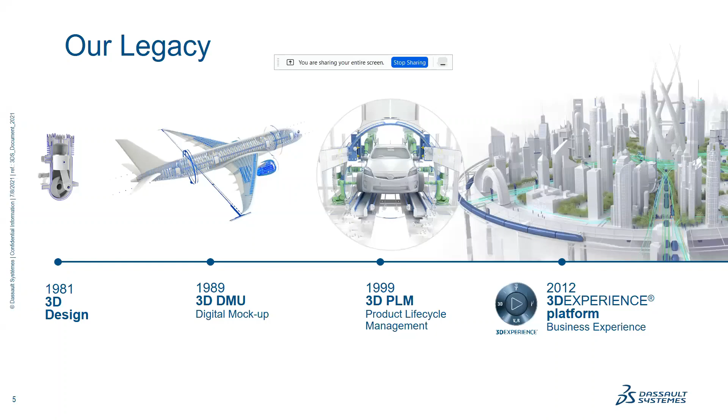So with regards to the topic I'll be talking on, we will be leveraging the technologies and software solutions that Dassault Systèmes' 3D Experience platform gives to come up with an end-to-end solution for a requirement like additive manufacturing.

As you all know, additive manufacturing helps in lightweighting and coming up with innovative design concepts. We need to work on a way of identifying the requirements and automating the best practices to generate designs, and optimize from a design exploration standpoint.

Once that design is identified, we also need to virtually validate it by understanding the physics of the problem and solving the simulation considering all the scenarios or load cases the component will experience, right from the coupon level or small material property level to the complete part level functionality.

The platform helps automate through different rules and templates to enable one to replicate the workflow. Subsequently, there is a lot of testing needed to validate any innovation, so we can leverage the test data management we offer on the platform to do complete physical testing to confirm our virtual validation.

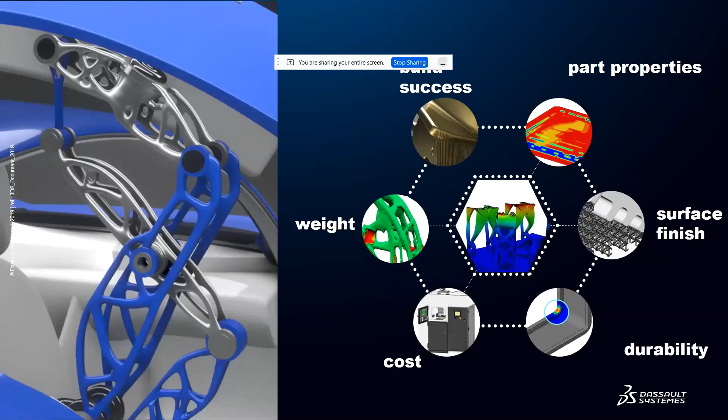What are the typical challenges one looks at, and how can we leverage simulation to address them? Right from the design part, where we have materials of different types - metal, plastic, ceramics - and different requirements, right from stiffness to compliance, which need to be considered upfront in the design stage.

In manufacturing, there are a number of challenges in terms of what material choice we take, what is the impact of the design on the production, and what is the productivity for this part of a design, and so on.

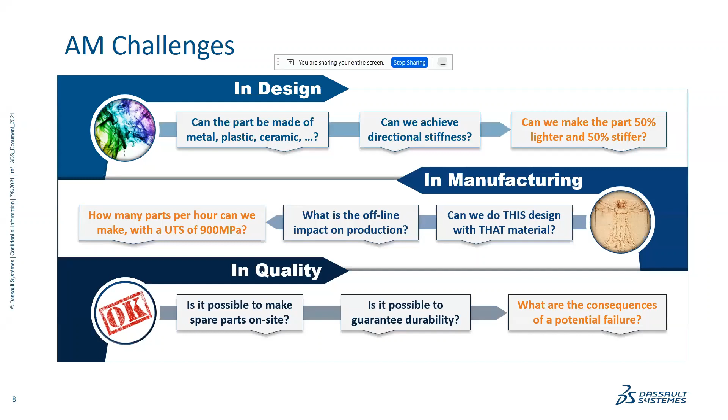Likewise, once the part is manufactured, whether it is possible to meet the necessary on-site manufacturing capability, or whether it is going to have any failures, or what is the durability or life cycle of this part. These are all new challenges which have already been addressed in engineered components, but manifest differently with new technologies like additive manufacturing.

The challenges range especially with regards to metal additive manufacturing, where we are converting a powder into a 3D part. The fascinating thing is we are looking at creating something ground up, right from the powder form, right from the raw material form, to a complete functioning part.

That is the power of this innovative manufacturing technology, where we need to think about, or where we have the opportunity to come up with very unique designs with regards to additive manufacturing.

With the pace at which manufacturing technologies are catching up, we are able to leverage innovative machines which allow for multi-laser manufacturing, and also creating different high quality finishes with low defects and field behavior aspects. These are all amplified when you consider the use of innovations in the software technologies available at our disposal right now.

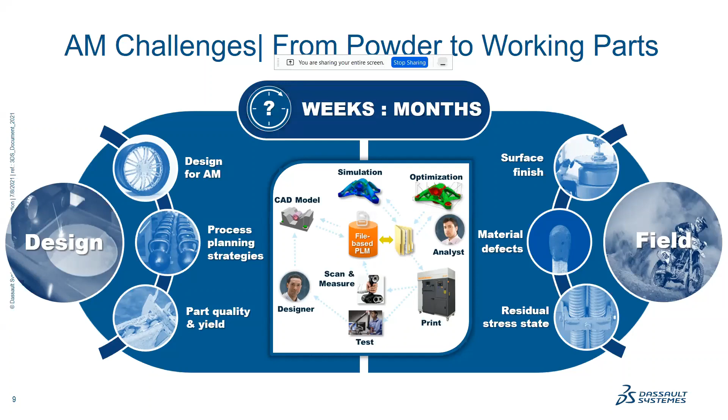So you have the state of the art CAD solution working in tandem with simulation, and also the innovations of the machine, to be able to come up with new design programs. Earlier, these kinds of workflows, especially in design, used to be file based. Now with innovations like we offer, we are able to reduce the time cycle for addressing these challenges from months to weeks.

So these are some of the benefits of how, by going digital, we are able to use domain specific tools and work in a collaborative environment to eliminate the different silos that occur when you are working individually. Like say the designer is working out of sync with the manufacturer, who's out of sync with the supplier, and so on. The digital platform helps connect these different silos and unite all the functions, which can eventually provide the best business benefit and leverage sustainable innovation to come up with a better product design.

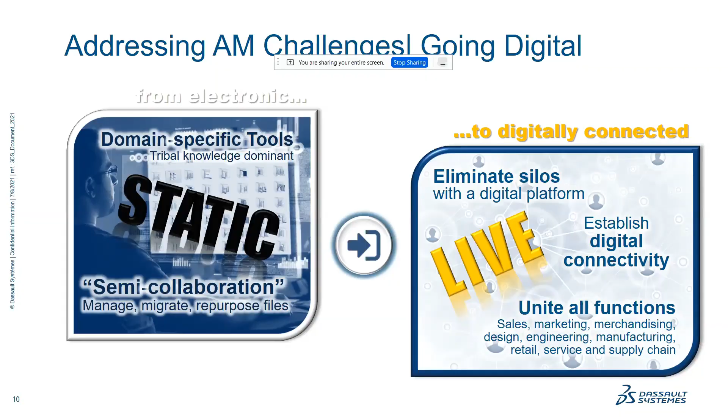So the 3D Experience platform is a data-driven platform which is connecting the different silos in a model-based virtual environment. It works similar to an app store, where you have a platform like a Windows system or an Apple iOS, where you have these different apps which are plugged in, and all our apps are developed in house. We can develop apps for CATIA, which is for 3D modeling, for Simulia for simulation, for the backend data management, and so on.

So these technologies are what we are going to use, and we provide for doing our overall end-to-end lifecycle of simulations for additive manufacturing. These give us the tools that are necessary to come up with new ways to engineer the products at different scales and to enable innovation in a very efficient manner.

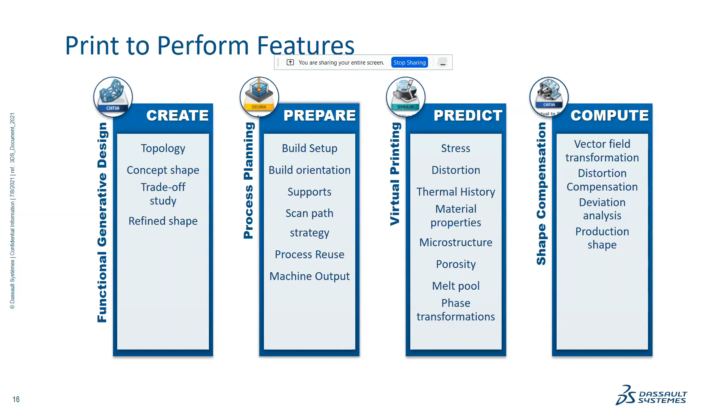So the first part, which will help us generate the optimized lightweight design, again through simulation, is called functional generative design. Let me take you through some snapshots and key aspects of the process.

So the workflow is like you start off with a certain requirement. You are trying to reduce the weight of a part, like say you're looking at a bike swing arm. The swing arm is made up of multiple parts.

In another application, you're looking at a hydraulic manifold, and you're looking at some flow conditions which could be optimized. So the generative design is not only limited to structural; it could also be through some sort of flow optimization in either of these cases.

So you have such requirements, and then what we need to do is start off with what we call the design space setup. You indicate that this is the space or the overall volume in which my final part should appear.

And then we set up the different constraints and targets, like any boundary conditions, such as fixing up a certain part in an assembly, like a swing arm in a chassis. There will be certain points in which we want to constrain, and then we can specify targets, like for the design space I want to reduce the volume to a certain level, or my mass of the part that I'm getting optimized should be so much. And then we can give the loads and boundary conditions and any manufacturability conditions.

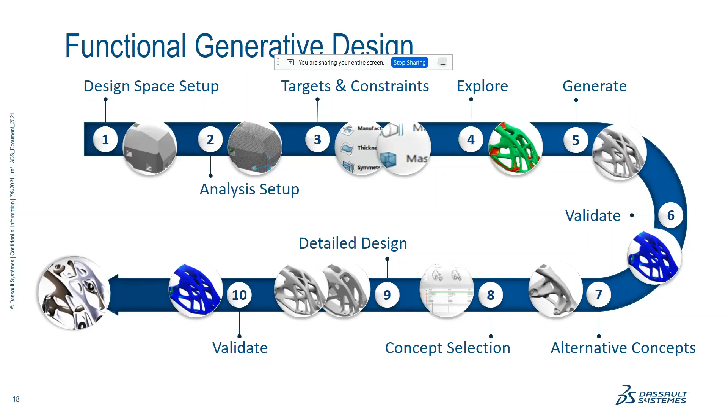And then you can do a concept selection based on these, and you can seamlessly analyze against these different KPIs, the key performance indicators, to understand which is giving me a better design. And then once we do that, we can go in for a detailed design and validate that and even make it.

So our additive manufacturing with the functional generative design, as you can see in the animation, you're looking at a part.

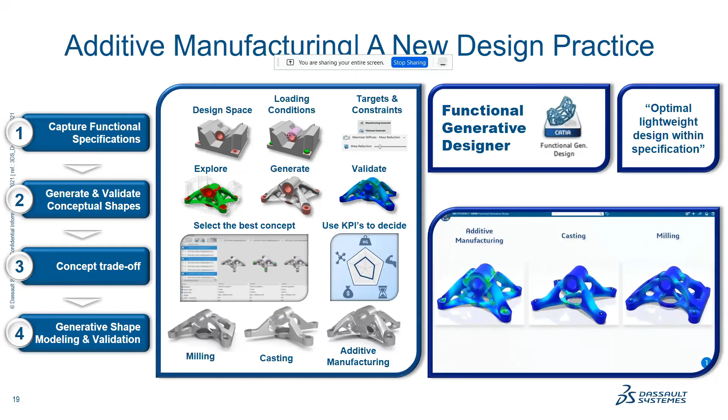The design space is shown here, where we have a design space which encompasses a larger volume. Then we constrain it at certain locations wherever we are fixing it up, and also specify the loads. Like in this case, some bearing load is given, and we are fixing up certain locations. And then we can give different manufacturability constraints, like casting, milling, so we have a set of design shapes, design choices, and then we can seamlessly validate those with the loads, and evaluate the trade-offs and which is a good choice of the design.

I'm just playing a quick video to show you the workflow process. It does not have audio, so you can just see in a larger format the workflow that we just talked about. Here you're looking at the design space creation for this part, which is shown here. So this is the design space.

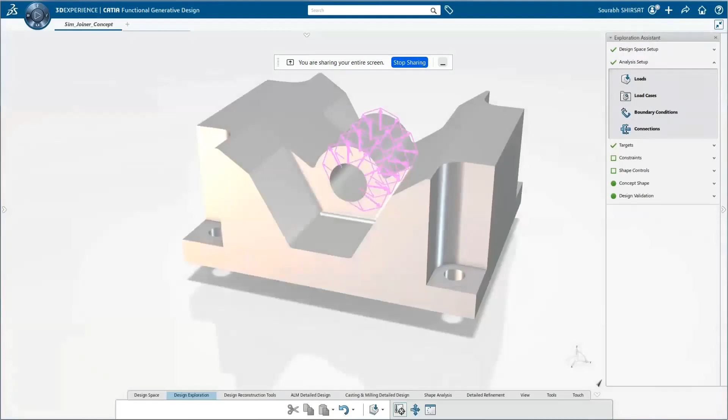So we will set up the model quickly as we discussed, mesh it, constrain it, and apply the necessary loads and boundary conditions. So you have a bearing load which has an offset, and then you have constraint locations at the connection points, which are basically left untouched during the topology optimization, where material is removed from the bulk to reduce the part while meeting the structural stiffness or compliance requirements.

So you can give different constraints, thickness constraints, manufacturability constraints. If you want to do something like casting, then you specify the direction in which we are going to remove the part. If it's milling, then we specify the milling constraints. If it's additive manufacturing, we could specify the overhang constraints to ensure that the part does not have features which are overhanging by 50 or 60 degrees, and so on.

And then you can even visually see here what the process is, to understand the different parts that have been done. So you have a casting which has multiple components to the runners, additive manufacturing, and also milling. So this is a common tool, it is not limited only to additive manufacturing. So we then use this as a complete end-to-end design optimization solution.

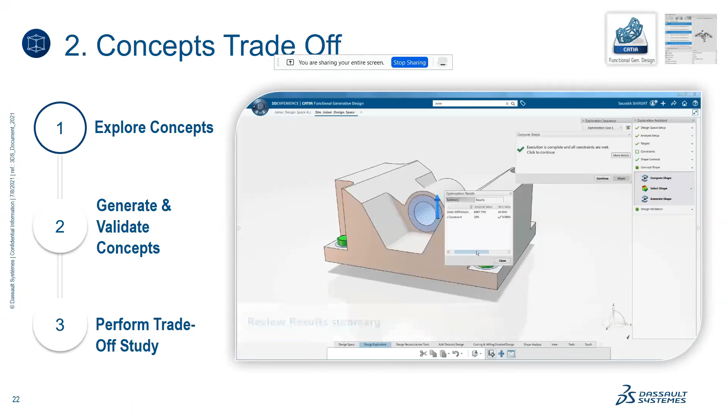So just to summarize, the workflow involved creating a design space, defining the loads, boundary conditions, defining the targets and constraints, and then we can run the simulation to generate different shapes. Once the simulation is completed, we can generate the concept shapes. So you can see here some of the different concept shapes that will appear based on the satisfaction of the constraints and also the targets.

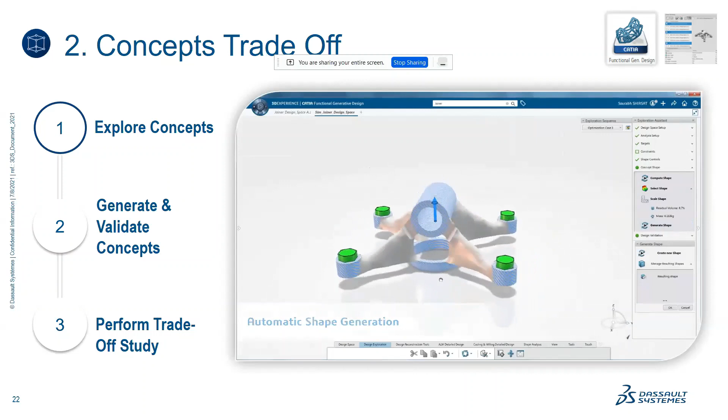So we can see here the solution. Then we can generate the isosurface values based on a slider-based mechanism, where we can choose the level at which we want to consider the mass. So then we come up with a concept for the topology optimization, which gives us a platform to improve the design in an incremental fashion.

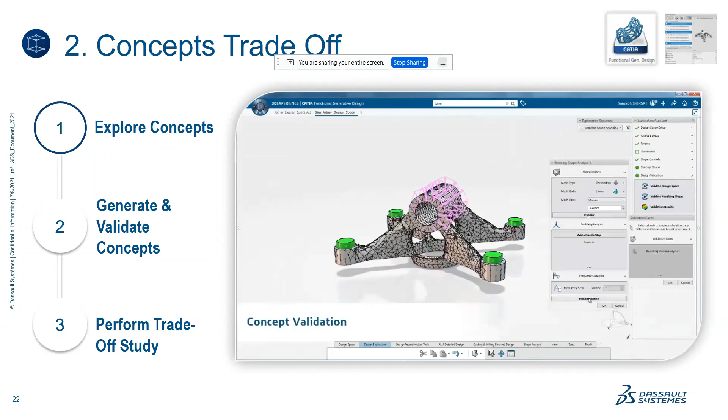So now, without going into any refinement, we can just automatically validate the part. But obviously there will be some manual work required in terms of smoothing the part and so on, to eliminate some of these hot spots through the process of shape optimization, etc.

So our solution gives you a complete, easy to visualize set of options to monitor the optimization process, as well as to generate these quick concept shapes based on the B-rep results, which will eventually help us to generate the structural geometry in a very easy manner.

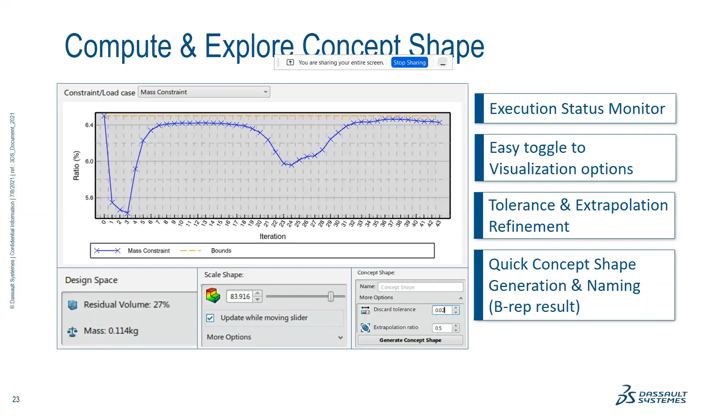And since we have a very strong portfolio of products for 3D modeling, we give that benefit of regenerating the surfaces in a very easy fashion, where you can quickly smoothen out the part and generate certain features which the solver might have ignored in certain locations. Then manually we can inspect the part in the virtual platform, and improve the part features, and then improve the design aesthetics, which sometimes are not considered in these kind of optimization solutions.

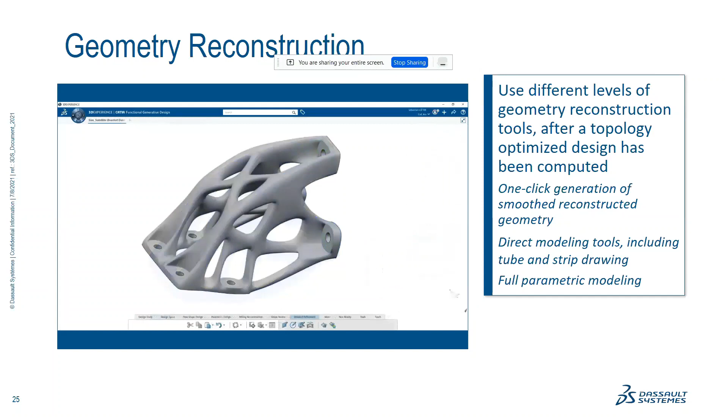And then we are able to validate this newly smoothened out designed part.

These overhang constraints, which help in the additive manufacturing space, work by restricting the kind of part features which are generated as material is being removed, so as to not exceed a certain angle of overhang. These help with challenges in support structure identification, orienting the part on the build plate, and so on. Such constraints upfront in the design space are helpful in reducing late stage issues or complications from a manufacturing standpoint.

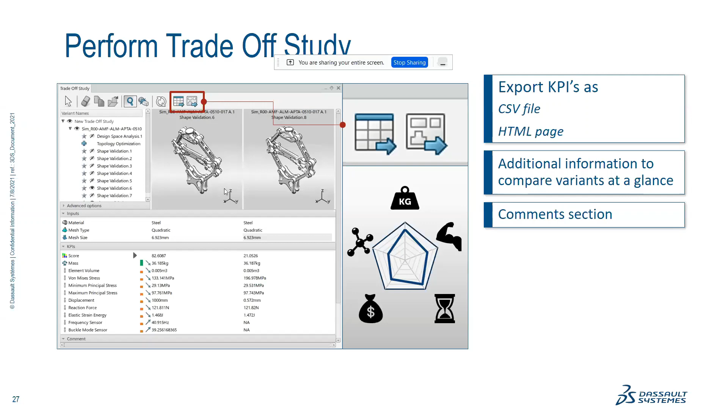We can then perform KPI based studies and trade-off studies. For example, say you have two different shapes that have been generated, you can see what is the mass, look at the peak stress values that have been identified, and see the different responses of the part for the load cases, all visualized in a dashboard fashion.

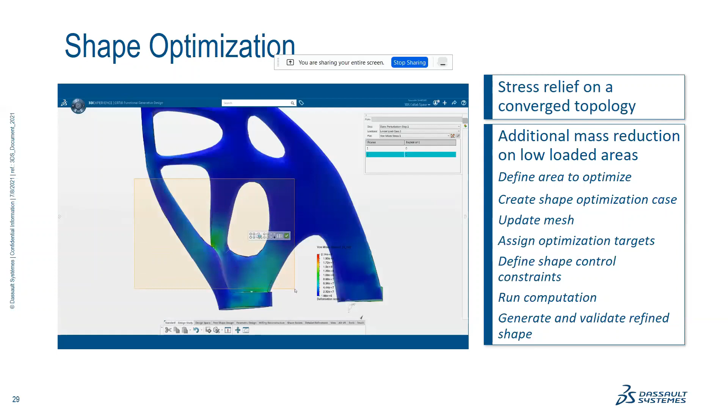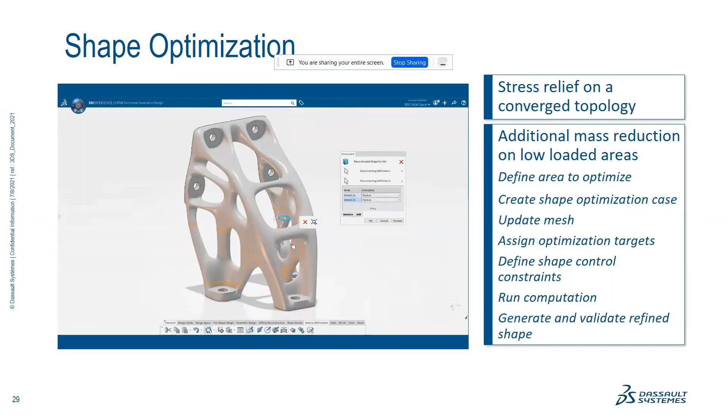Shape optimization is the process by which we can further refine the design to improve structural performance, reduce mass, and remove any local hotspot stresses, improving the design overall. It's where we take a legacy part, generate a topology optimization part, and then improve certain regions to give a smoother, more refined shape to eliminate these hotspots. As you can see in this demo, certain kink regions generated from the optimization have been smoothened out in the shape optimization solution.

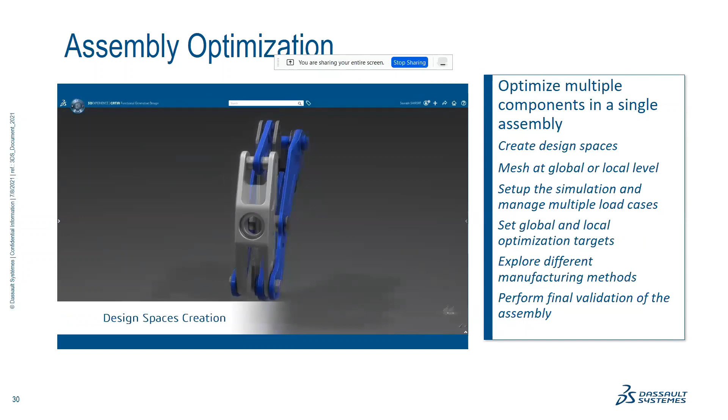Additionally, we can also do optimization from an assembly optimization standpoint, where we optimize multiple components in a single assembly. We create the design spaces, mesh at both the global and local level, then set up the simulation, manage multiple load cases, explore different manufacturing methods, and perform the final validation of the assembly.

We offer a guided step-by-step framework where you have these three different parts which need to be optimized. We specify the loads, set up the simulation for topology optimization, and let it run to give us these different concept shapes.

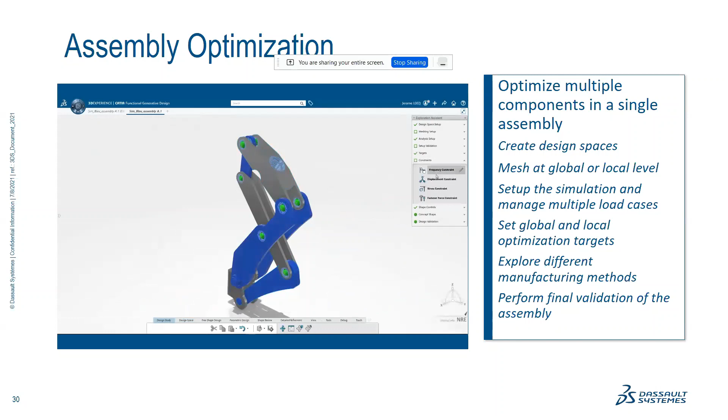We have a load case manager where you can handle multiple load cases. We specify the requirements in terms of design space, target maximum stiffness, weight, and so on for these different parts, along with any manufacturing conditions, like a milling constraint. As you can see, the design shape generated from these parts is shown here.

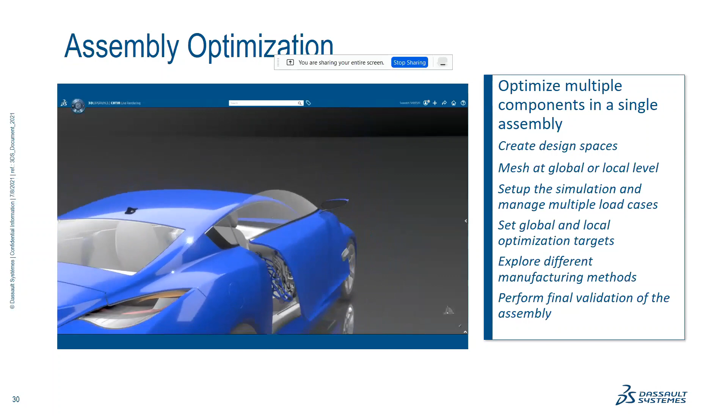We then perform the final validation of the lightweighted part and check whether it meets the requirements.

The next stage, once we have the design, is to prepare the manufacturing process for additive manufacturing. The manufacturing simulation workflow is done through the Delmia brand of applications on our 3D Experience platform, providing a complete virtual environment for manufacturing process simulations. For additive manufacturing specifically, the workflow involves a build planning stage where we can represent the machines, bring in the part to be printed along with the machine, and work on orientation, support structure generation, scan path, and print generation, which we'll see in the next few slides.

The step-by-step process is designed to reuse as much as possible. In an industrial setup, you have the methods development team, consisting of expert users who prepare different templates and rules and save them, which can then be replicated by field engineers or the design team to maintain a high quality design standpoint. It's challenging to expect the advanced team to apply their expertise to every single project, so their support is obtained through this rule templatization and replication of the different process stages by the design team.

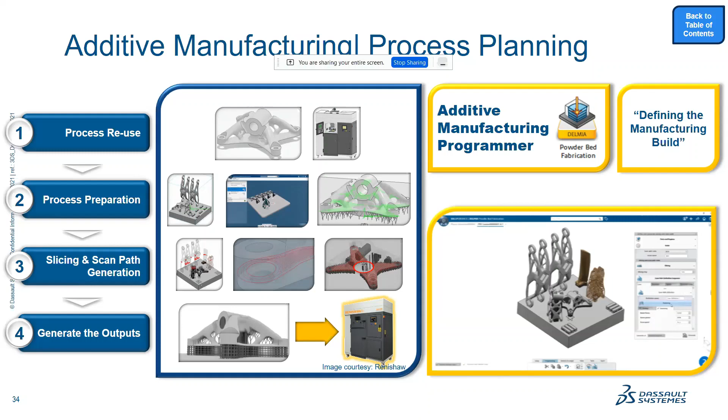These generated outputs are seamlessly replicated in the simulation workspace to get as accurate as possible scan path motion and slicing, so we can represent the equipment design from a virtual machine standpoint.

We incorporate the complete gamut of data needed to represent these machines, from the build envelope size to the scanning path type, the directions of coating, and the speed of the recoater. There are numerous customizable parameters available as well.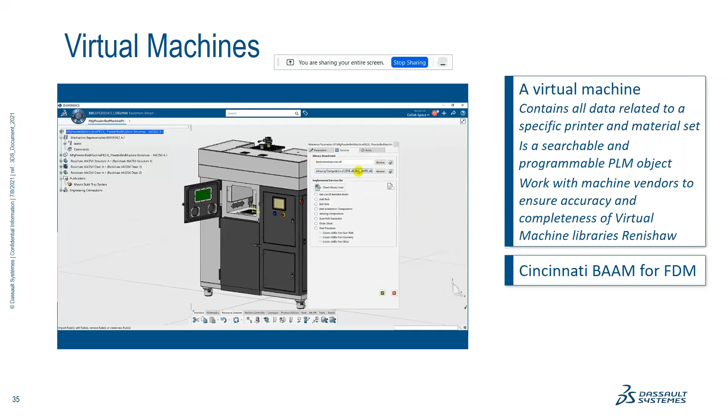It helps you build your own library. It's not a complete library deck that's provided, so you can have numerous machine vendors replicated through templatization of the machine data.

It helps to reuse the process as much as possible to amplify and reduce turnaround time. You can retrieve material and orientation information from our database, then use the specification for that material. We can then templatize rules for nesting, support creation, laser path motion, slicing definitions, and so on.

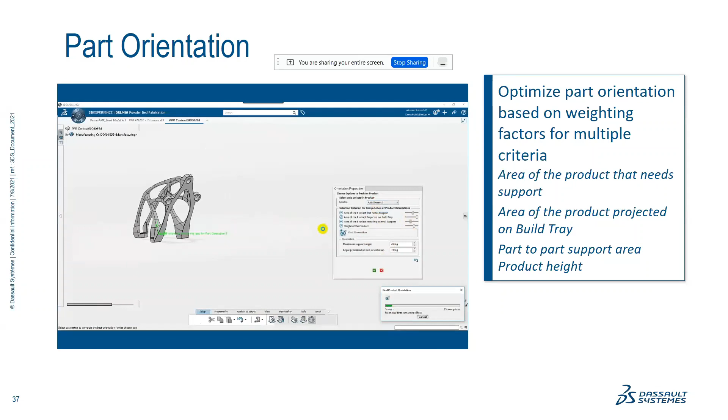Here's an example of how a part can be optimally oriented on the build plate. You have multiple factors, addressed by slider ticks. You can see the slide bars which drag left or right to reduce or increase the impact of a certain optimization parameter.

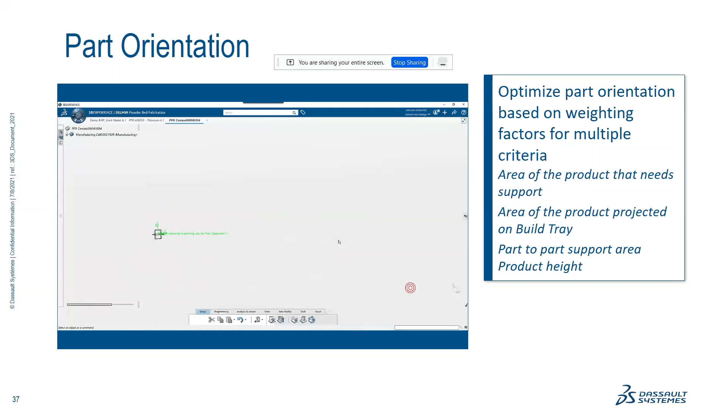You can reduce the surface area of support structures projected onto the build tray, or look at the product regions that need support structures, and so on. All these orientation-based evaluations can be done in the virtual environment.

We can also create multiple parts to be printed in one workflow, and then orient these parts suitably. We have collision detection capability, and we understand how to reuse orientations for parts of certain types.

Likewise, if we are generating any supports or parts, and the part is repositioned, the support being generated also gets realigned to the best level possible.

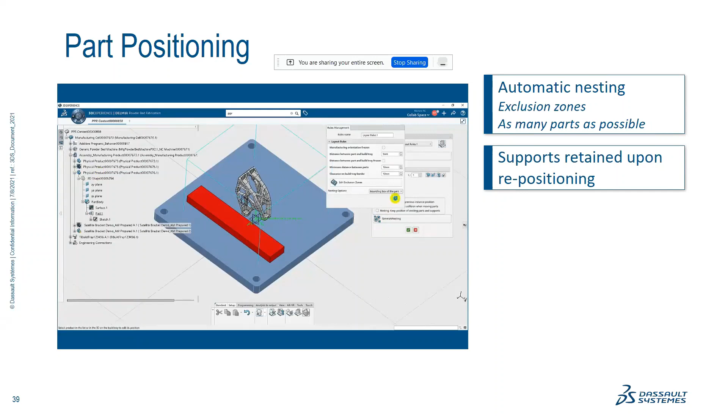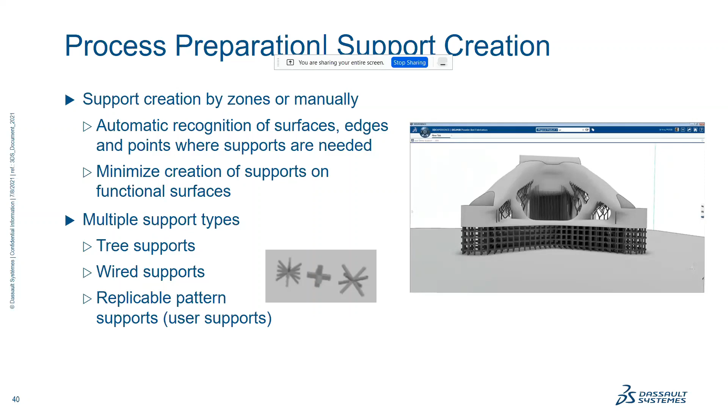The next part is to generate support structures, either by automatic creation or manually designing the parts. You have automatic surface recognition, and edges and points where supports are needed can be generated. We offer different types of supports, like tree supports, wired supports, and so on.

You can also manually create these different types of supports, since we have the design capability, or use the automatic option. Here we're showing tree supports, grid supports, and lattice supports, which are generated automatically.

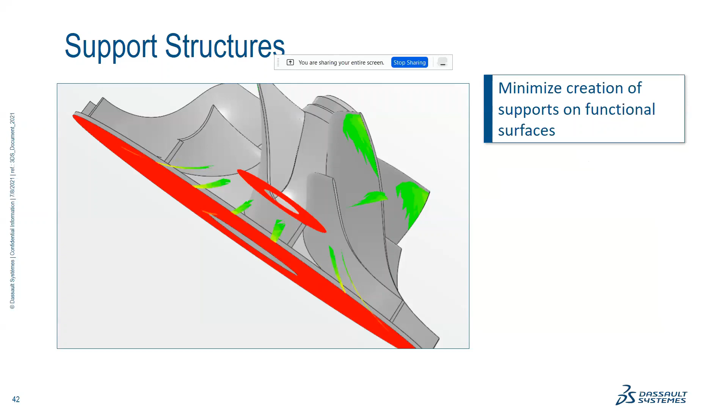These supports can be generated based on minimizing creation on functional surfaces. We can specify certain regions where supports are not to be generated, and green regions where supports can be provided.

Additionally, we can create multiple support structures through design in case certain automated supports are not desired, and then manually design the support structures.

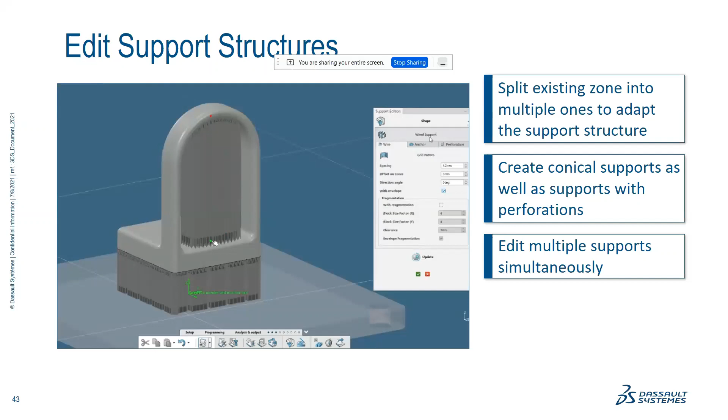As you can see, there's a certain internal support not connected to the build tray. If we want the supports aligned on the build tray for ease of removal, we can redesign the supports manually, edit them, and then issue for printing. We provide the necessary tools for support structure part creation.

The next part of the process is to generate the slicing of one part or multiple parts. We have all the parameters for different strategies, including an area-wise strategy or multi-strategy approach for different areas, in terms of skin layer thickness and core domains. Then we can change the slicing strategy, including hatching direction, between each slice.

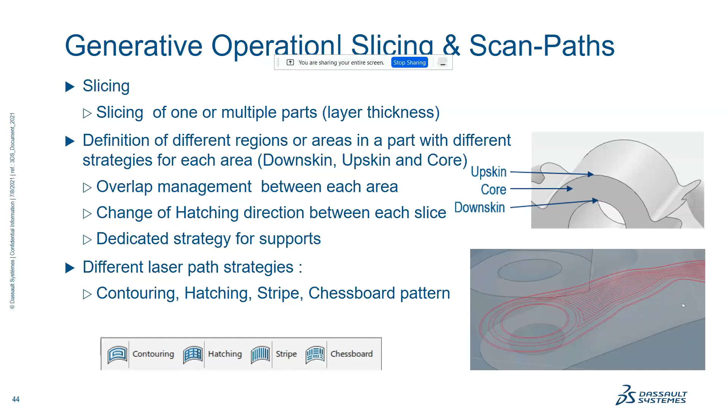We can have multiple rules for the part or supports through the laser path strategy. We offer an icon-based, templatized, guided workflow for slicing and scan path generation.

So as you can see here, you have a part which is oriented. A support structure has been generated, as is highlighted. We have assigned the material properties, and then we are basically going to generate the scan and slice path.

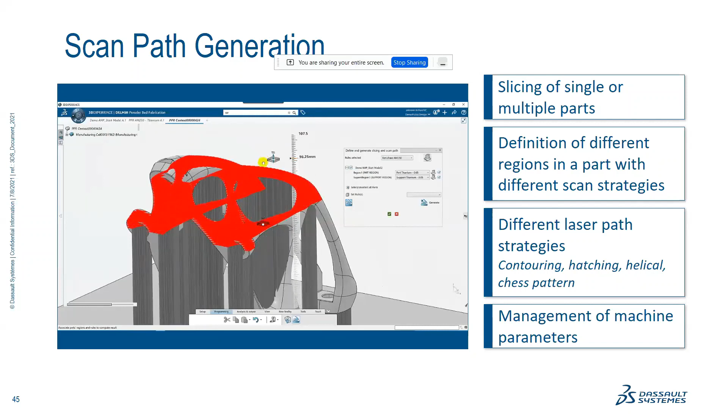So we can visualize the scan and slice path, like what is the laser path motion along each scan layer. Based on the scanning strategy, we are able to visualize the laser path motion virtually, and then based on this, we can come up with multiple options depending on the runtime that is estimated for this.

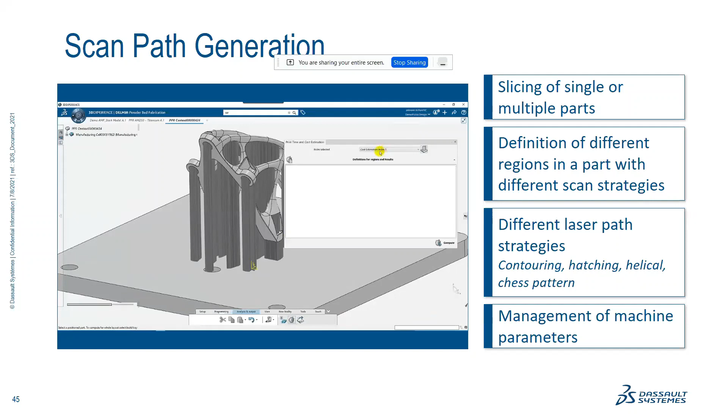So we can change the distance between the laser path motion, or the number of squares that go into a checkerboard pattern. All these things we can vary.

So the next part is, before we go into the detailed simulation aspect, a quick simulation along with the supports. This quick simulation is based on an inherent fast strain method called the Eigenstrain approach, which is based on a library of generated scan paths, and then we automate the simulation through linear analysis and give a kind of quick gap analysis between the virtually printed versus the as-designed part.

Just to reiterate, this simulation does not take into account thermal behavior. It is a quick solution based on the fast strain method.

And once that kind of designer level validation is done, then you can go in for output generation. To a reasonable extent, we can expect the part to behave in a certain manner.

And then once these kinds of outputs are extracted, we can feed them directly into the machines, or we can interface with these machines through their native formats or through neutral formats.

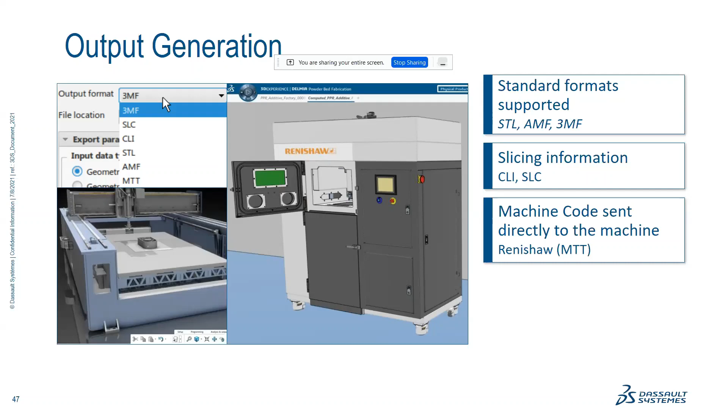We can also obtain print time as well as cost estimation. We can add new rules to estimate the total print time. We can add print cost as an output, and we can even work on optimizing it based on those kinds of parameters, like print time or print cost.

The third stage of our process is called virtual printing, and we talk about this from the standpoint of a realistic detailing of the design through the process of simulation.

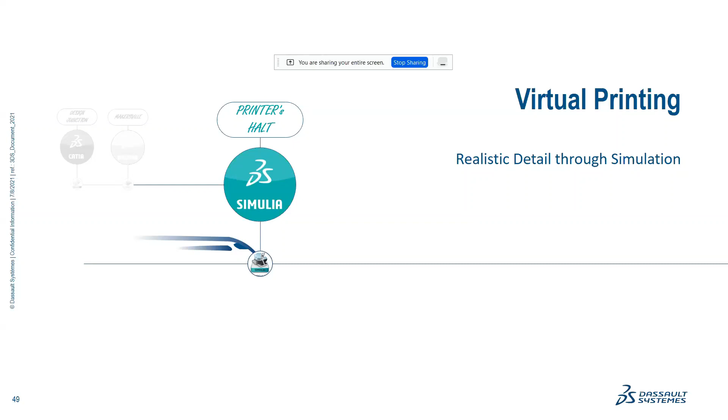So let me go into a bit more detail here, to go into the development which we have carried out, which will help one to understand from where we were to what we have achieved with our new solution technologies.

So it started off in 2014. We started as a technology based on what we call a chunk type, or a kind of domain replacement technology, like you remove the first part of the design and then slowly add the domains one by one as the laser path is moving. That was how we started off with our additive manufacturing simulation.

And then in 2015 and 2016, we developed what is called a mesh intersection toolkit. It was now becoming a toolkit which was delinking the mesh from the CAD design, so we can have a certain mesh or different meshes for the same design, and then we are not limited or restricted in creating meshes based on the geometry boundaries.

So that mesh intersection toolkit was developed, which accelerated our development to the print-to-perform capabilities, which leveraged the end-to-end solutions that we offer from these different brands to reach an extended simulation framework which covers the entire ecosystem of the additive manufacturing process.

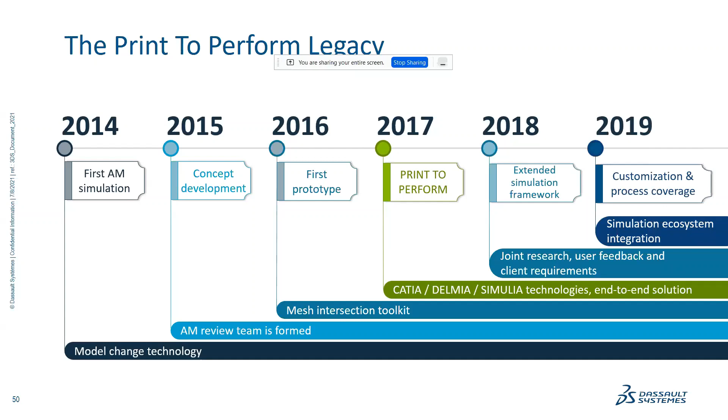So in the process simulation standpoint, we are looking at studying basically the distortions and stresses, and eventually any build failures that could occur.

So we can also look at the properties of the material in a localized standpoint through microstructure evaluations. These process simulations enable us to give a lot of insights into the performance of the part, because these are some data which are not obtained from real world printing.

During printing, incorporating thermocouples or identifying residual stresses and all that are very challenging. So virtual simulation helps to give us a better understanding of the printing process.

So we use the Abaqus solution to do a simulation of the multiphysics analysis.

That is basically a thermal analysis coupled with the structural analysis. So this gives a complete map of the laser heating the powder and generates solidification phenomenon based on phase transformation.

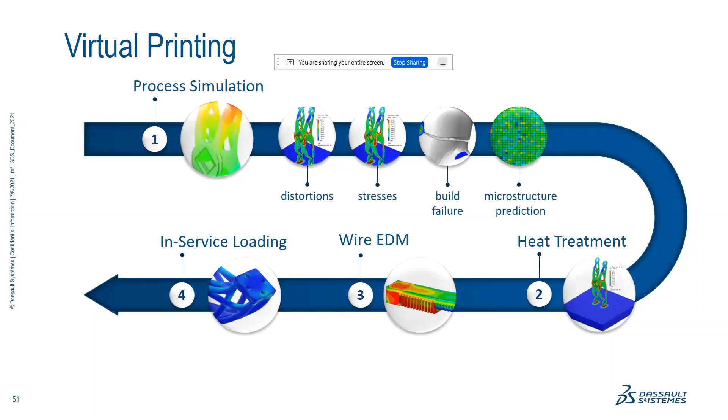So the additive manufacturing simulation capability gives us a complete comprehensive additive workflow solution, and we are able to use optimization of parts to virtually test and manufacture these builds. So we are then leveraging the multiphysics technology to provide a complete simulation capability for in-service loading cases.

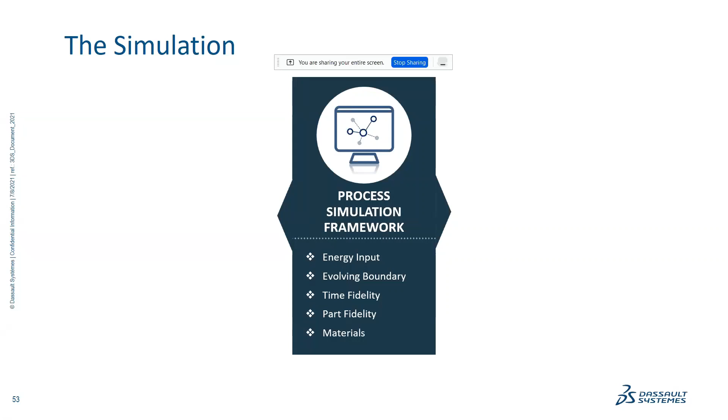So what are the details of the simulation framework that we are using? The process simulation framework for additive manufacturing is the set of tools that we include in the framework for modeling the evolving boundary of the material as the energy input is progressing through time. So the material modeling is very key in this workflow.

And so then for different processes, we need to generate a framework which will address these different processes, like powder bed or energy deposition or polymer based extrusion and so on. And then we work with different machine vendors who have their own formats and so on. So the simulation has to take into account these challenges as well as complications.

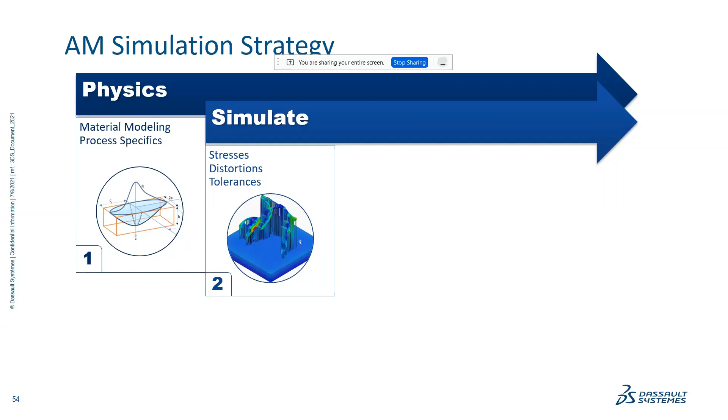So what is our simulation strategy? Our key focus has been on, in addition to the mesh intersection toolkit development, the material modeling process specifics. So you can see that the heat affected zone modeling is very critical to be able to simulate the stresses, distortions, and obtain the tolerances, and eventually calibrate the gap between the design versus the build. So which is all critical.

And so the simulation strategy addresses the right from the physics standpoint to the end customer satisfaction or the return on investment of an additive manufacturing program.

So this virtual printing process is based on a guided simulation assistant for powder bed fusion process. So this is on our Simulia brand of applications on the 3D Experience platform. And as you can see here, we have a configurable general purpose process simulation framework, which can be used for setting up these models.

So you can see some examples of how we are able to remove the supports, and you can see the cantilever warping in the bottom left animation. And on the right side animation, you can see the guided templatized workflow for setting up the virtual printing simulation on the build.

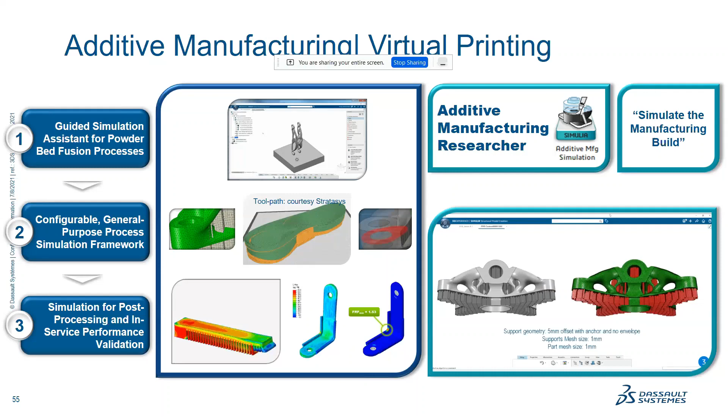So we set up the thermal analysis, the structural analysis, and then the solver does the rest. So the user is not required to go in for a step-by-step process simulation setup. So it is all done in an automatic fashion.

So this is, as I said, the key highlights are a guided simulation assistant, which works with a configurable general purpose simulation framework. And we are having a capability to simulate the in-service part performance once the part has been generated. So what is the key technologies that go into the simulation framework?

First, as I mentioned, is the mesh additive manufacturing tool intersection kit. So basically, you have from the process simulation the data, including the power for the laser, the rate of deposition, the recoater times, the build, any parameters of the build which are adapted, and so on. And the toolkit provides the capability to come up with geometry intersections of this virtual tool along with any arbitrary mesh.

So as you can see, you have different schematic representations which need to intersect with the element. So you have one-dimensional elements, rectangular elements, three-dimensional box elements.

So how do we link it with the mesh? So you have, say, a laser path motion, which is treated as a point line motion. A recoater motion could be like along the same axis, so it is an infinite line motion. Typically, as material is being added in extrusion process, it is done in kind of a rectangular layer by layer fashion. In the case of complex heating models in 3 dimensions, it is like representing the schematic by a box for the mesh intersection toolkit.

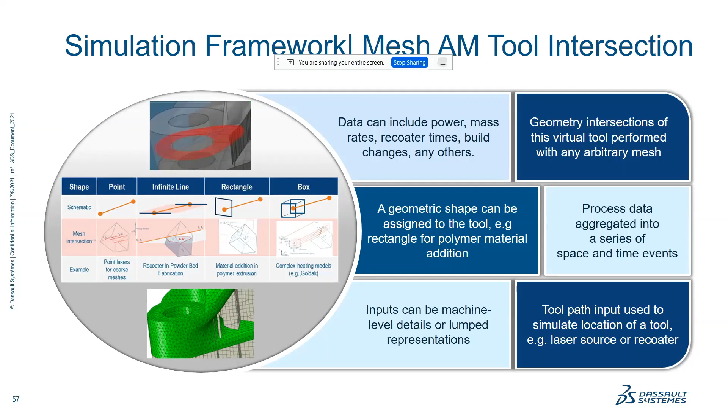So each of these data is then aggregated into a series of space and time events, and then we can input these into the lumped representation and toolpath input used to simulate the location of a tool, like the laser source or the recoater.

So that was about the mesh intersection toolkit, which kind of delinks the geometry with the mesh. So the next standpoint of the framework is how do we handle the material properties as well as the laser path energy transfer, which is key to the thermal capability, thermal structural analysis.

So we have the high fidelity data from the mesh as well as the space-time refinement, and we have programmed in with the built-in subroutines the heat flux physics, which has certain parameters like the beam size, or it could be certain power of the beam as a parameter, and a few more, which is basically converted into some form of a heat load, and then you can activate.

So as you can see in this, you have certain local regions. The image on right shows that if you take a certain volume of a domain, then based on the scanning strategy within that, the heat is generated, and those elements are activated as they are being heated and solidified. So in a sequence of events, we are handling this new surface generation as a free surface heat convection radiation problem, which will give us a complete solution of the thermal behavior.

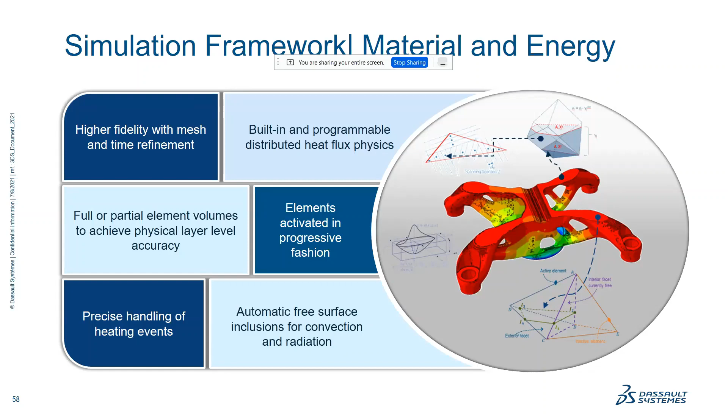So this kind of thermomechanical solution framework gives good feedback for the build performance. As you can see, we can get the thermal gradients as well as the distortions and the stress result. In this case, we are looking at a nested part print.

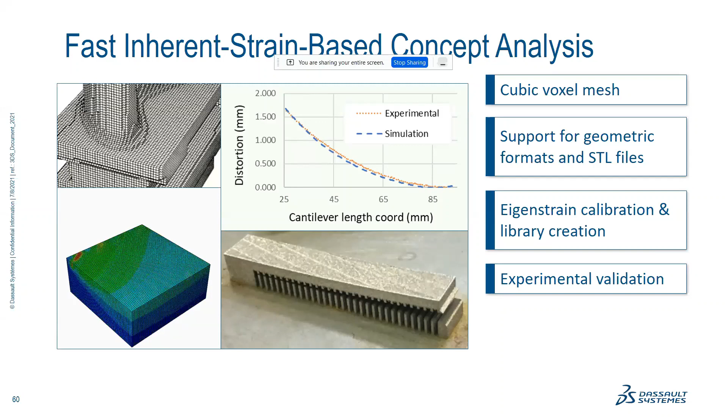So we talked about the fast inherent strain method. What is the difference between this and that? Basically, in the fast strain method, which is a designer level tool, we are meshing it with some cubic voxel mesh, which doesn't completely capture the surface in all smoothness. In the earlier thermal structural analysis, we mesh it using tetrahedron mesh, which gives good structure representation. In the case of the fast strain method, there is some approximation, but we are still able to get a reasonably good result, depending on how good the eigenstrain library is.

We can also virtually incorporate sensors to monitor the distortions. For example, you have an impeller blade being printed. So we are printing this blade, and what can happen is, for certain design orientations or lacking support structures, say on the right side, one of the blades, as it is being printed without support structures, starts to warp.

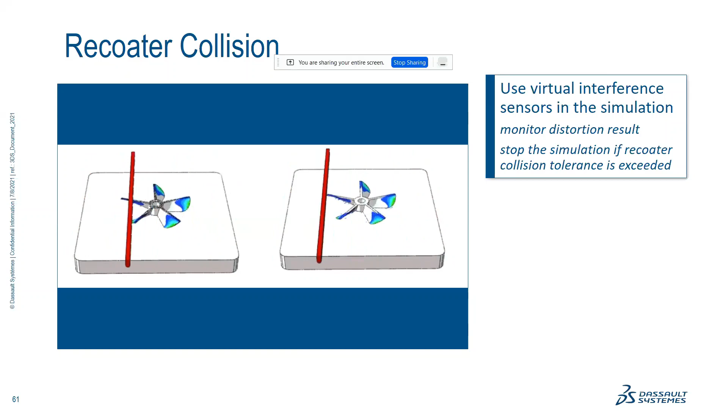As the part is warping, it affects or interferes with the recoater, which is depositing the powder and flattening it out. The part which was underlying it warps and hits the recoater blade, which can either damage the part or even damage the recoater. So to reduce this impact, we can represent that through sensors in our recoater collision capability.

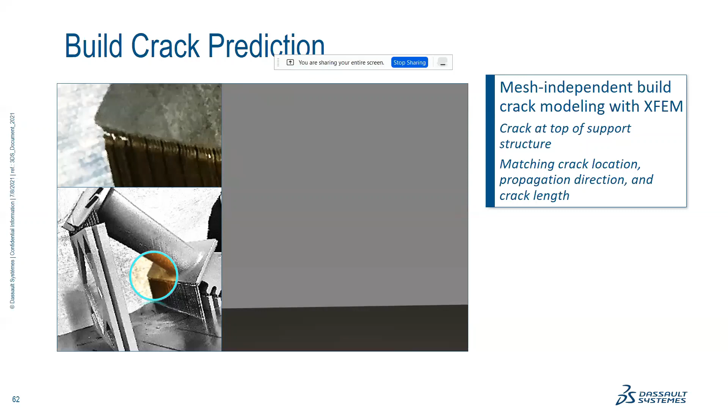To add more value, obviously failure is to be avoided, but unfortunately any solidification process involves some form of stress relieving phenomenon which causes these kinds of cracks. Simulation is a very powerful tool here. Based on an XFEM framework, we can identify regions where a crack is a potential initiator, using stress-based criteria or strain-based criteria, and then we can predict the crack initiation and propagation.

We can also incorporate virtual sensors to identify the temperature solution at any point inside the domain. As you can see in the graph, we can activate the history output to see, over time, what the temperature is. Then we can find out at what point heat is being applied at a certain location, and what time it takes to dissipate the heat to a steady state. Those details give insight into hotspot regions or weak regions, which we can eventually correlate with the part validation.

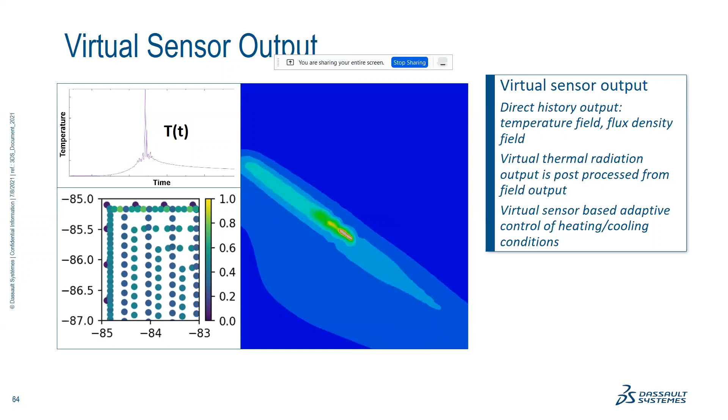So then, as a result, based on this, we can change our scan strategy suitably.

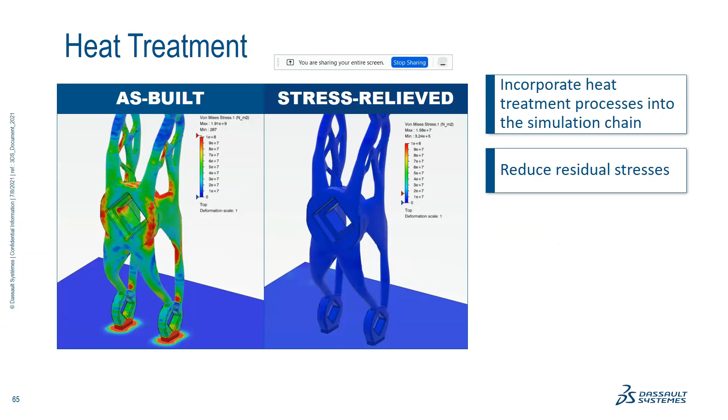Once the part is virtually printed, the stress solution along with the temperature solution is going to be at a steady state. We can eventually go in for some sort of annealing or stress relieving process to reduce the residual stresses virtually.

As I mentioned earlier, we can even do post-print treatment by removing certain support structures which have been tied in initially. Once the part is printed, those ties will transfer the loads in terms of any distortion, but eventually they need to be removed through some sort of machining, which can be activated through the removal of these interfacial constraints.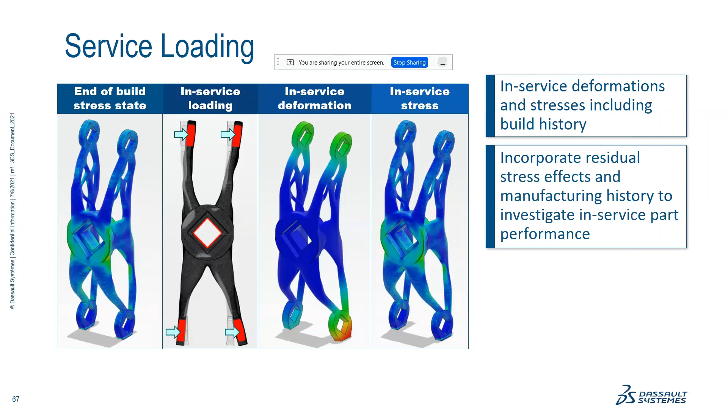Any service loads can be estimated in terms of how it is performing. We can look at the end of build stress state, any in-service loads, in-service deformation, and stresses.

One key advantage which we have seen used a lot in the industry is for repair analysis. You have a certain part, and it's not always possible to build a new part. So any part which has been functioning and has repairs is a limiting factor in performance. So it can be quickly repaired. We have the legacy design, so if any repair strategy is to be evaluated, we can virtually simulate it.

Say in case of a welding process or any part which is to be added, we can simulate the laser welding motion in this repair analysis, and then find out the best way to ensure that the part repair is satisfactory and able to meet the subsequent post-failure criteria in terms of part performance.

In addition to that, durability is also a very important topic. We need to study the residual stress, and based on the methodology in which we are estimating the fatigue life, we can assess the fatigue life, and also improve our design if there are any challenges which are observed.

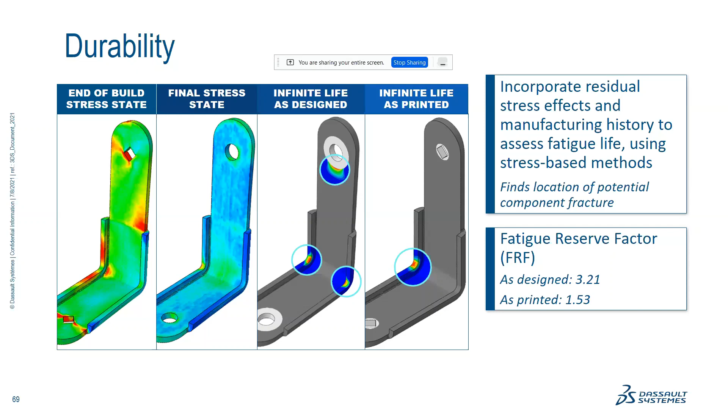To achieve all this, I talked about two key frameworks: one was on the heat flux modeling, the second was on the mesh toolkit. The third aspect is on the material property, how it is predicted. Here we take a multi-scale approach, right from the material behavior at a micro mechanical standpoint to the performance at the post solidification standpoint.

At the micro scale level, that is before the print, we need to do phase field simulations which are handled internally, and then the material properties are obtained through FE homogenization, which gives us a quick map of the properties for the overall domain. Then we can give the thermal mechanical properties for different types of materials as well. The same concepts apply whether it be metal or polymer and so on.

The next part is during the print, how do we map the material evolution? As the realistic temperature solution which has been estimated progresses through the design as the material is being solidified, we need to account for the phase transformation in a very scientific manner to accurately capture the behavior. We are looking at things like grain nucleation and grain growth, and also solidification characteristics like porosity which are generated, which gives a lot of insight into the strength and stiffness of the part.

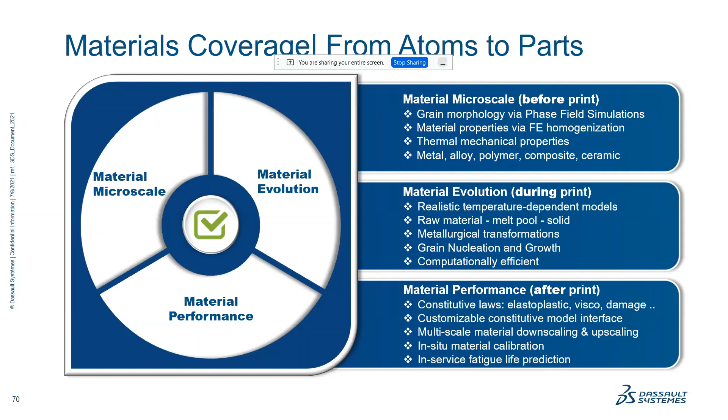So in situ, we can calibrate the material and estimate the fatigue life in a more accurate manner. Here we show some of the details in terms of the validations that are being done.

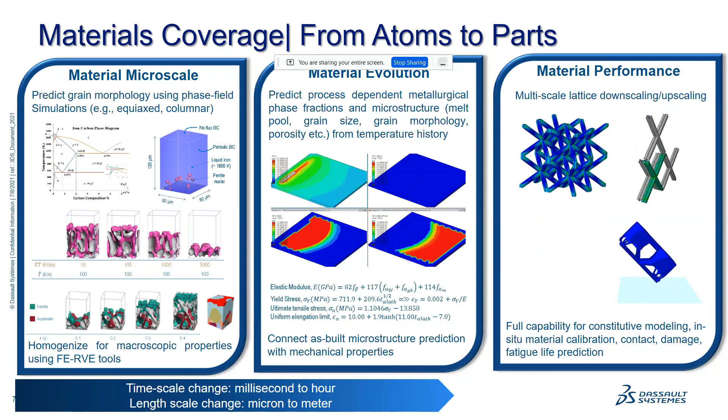Let us look at some of the validations, because as we all know in simulations, the quality of output is as good as the quality of input. So we need to give a lot of attention to detail for achieving maximum accuracy or fidelity through our process validations.

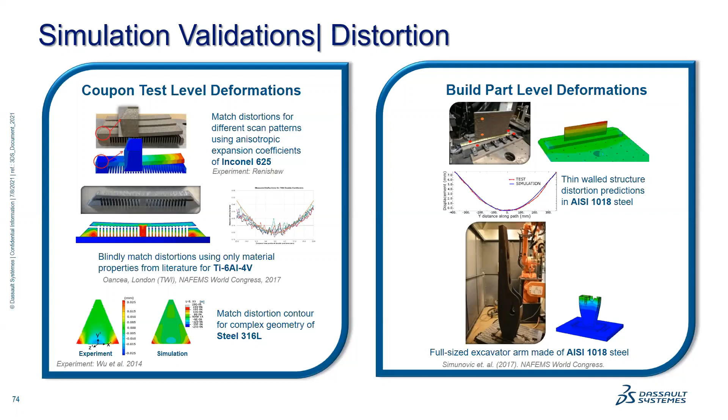This is done through different layer type coupon test level deformations, or even part level validations. As you can see, we showed the bridge which was printed with supports made of Inconel material. Once you remove the supports, what is the level of warp due to the relieving of stresses? That can be validated, and it was published as part of the development by our R&D team. Likewise, there are a lot of challenges and competitions among developers in terms of whose solution provides a good validation or simulation data to match the test. Those kinds of validations have been done even for steel material, and these developments are all part of our solver now.

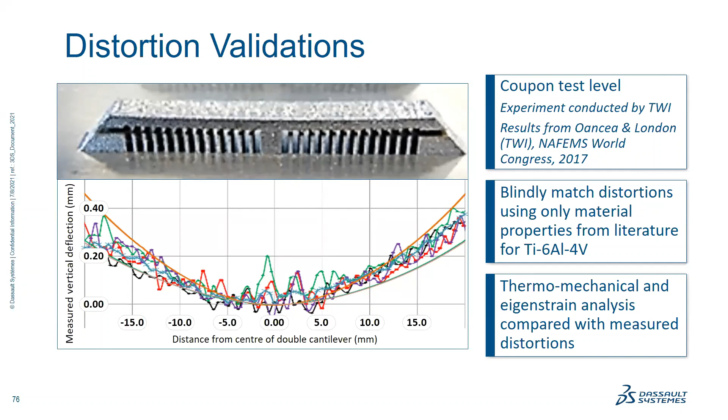To show in more fine detail, you can see here the part which was printed and the distortion profile matches to a reasonable level, taking into account the anisotropic expansion coefficients for the Inconel 625. For this double bridge cantilever, there were some blind match distortions done, meaning the simulation did not have the experimental data upfront, so a blind simulation was run, and the result matched very well with the test data. There was no way the model could be tweaked, so the model incorporated and used upfront was able to capture the test data to a very good accuracy. The thermomechanical eigenstrain analysis was compared with the measured distortions in both cases to validate it.

For the actual part level, this is part of an excavator arm which was printed by a big area additive manufacturing machine. This was printed with steel, part of the research work done by Oak Ridge National Lab.

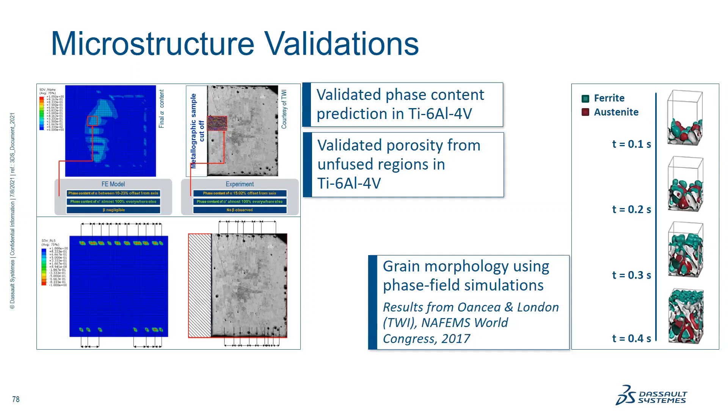Additionally, to capture the microstructural solidification accurately, you need to go in for microstructural validation also. As you can see here, work published focused on grain morphology validation through phase field simulations to identify the regions where you can have porosity, where there is not enough good fusing of the powder, and the possibility of defects which can occur. These simulations give a lot of insights, so you can plot contour variables like the alpha fraction of the phase, or even look at the kind of residual life for different locations and so on.

Other metallurgical validations are shown here. You can take localized solutions, and you can also take into account parts which are printed in cruciform form, then machined out, and test the tensile specimens to understand the macro level behavior of these materials. Instead of going for localized properties, you can also test uniaxial test specimens which are printed, machined out, and then tested, and use that data for mapping the constitutive equations.

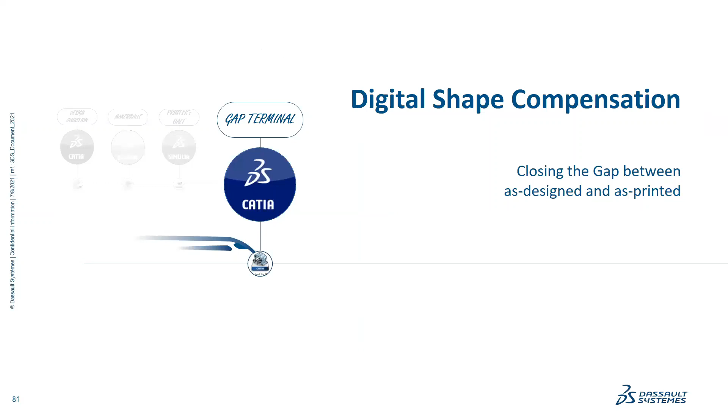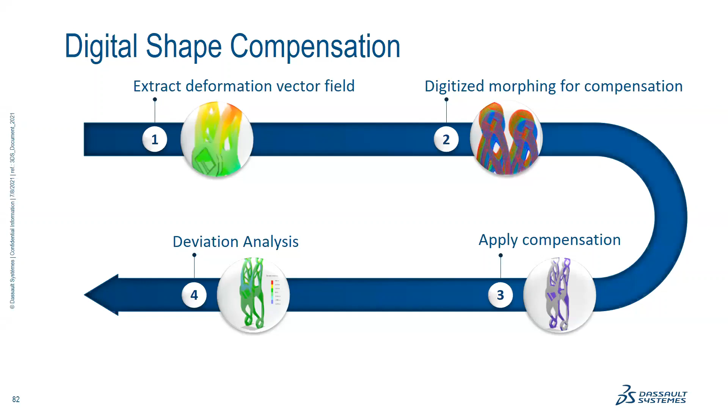The last part of the workflow is to close the gap between the as-designed versus the as-printed part. Once the printing is done and validated, there is a distortion in the virtual printing. So what do we do? We extract the deformation and then do a morphing of the original design to compensate that deviation. You do a negative of the distortion to change your original design.

And so this digital compensation can be done on this part. For example, you have a part here, and an analysis is carried out which gives you this displacement vector. You take the vector as a format file, and then change your original design to find the new design which has a negative compensation, so that you can then use that to print.

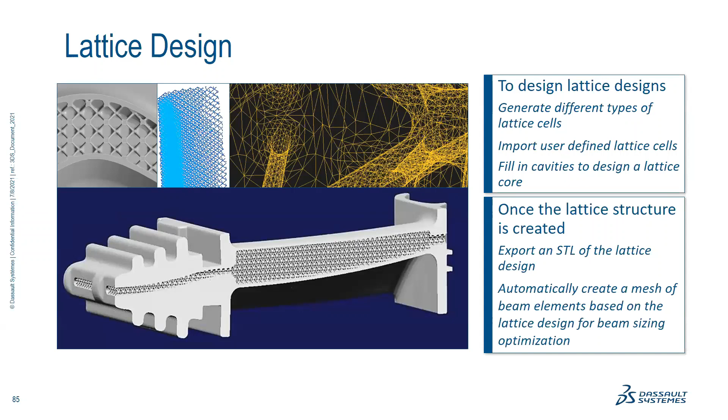A lot of aspects of lightweighting without any design alterations is through lattice design or lattice generation. We have the capability to generate these different types of lattices which can eventually be printed. You can also generate the CAD, which will be helpful in doing your FEA simulation. We are working on new technologies like beam-level analysis or optimization, which can then be sized to generate the fill thicknesses or fill volume.

So how do we analyze a lattice structure? It becomes quite challenging if we have to mesh everything, so we go in for a lattice-type beam analysis instead.

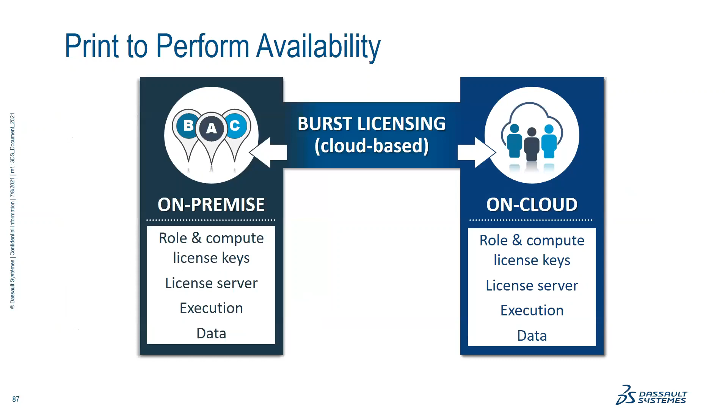In terms of our solution, we have it on both the cloud as well as on-premise. We work with both cloud license models and on-premise license models. We use the cloud-based option for any burst computational requirements, or on-premise in case of continued availability of the capability.

So to give you a bird's eye view of our strategy, we have an end-to-end solution, right from design to simulation, leveraging multiple industry solutions in a connected application format.

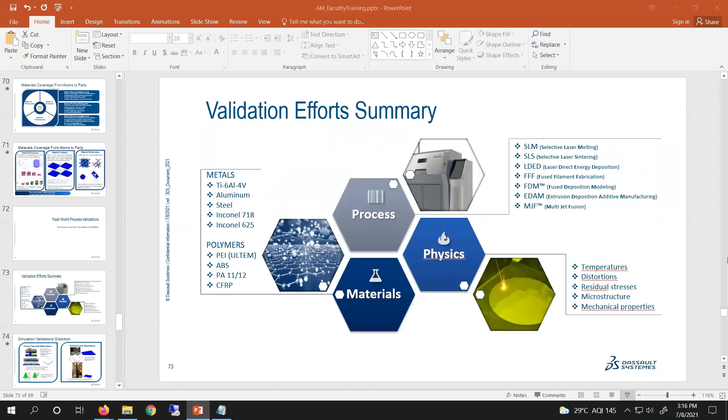So there's a question on whether we offer a dedicated course. Yes, we do offer that. Please get in touch with us, and I'll share my email address through the coordinator. We hope to hear from you.

So, have you presented some case studies on how to do this particular additive manufacturing simulation step by step in this talk? Yes, we covered the end-to-end process, how our solutions and technologies help prepare the design as well as the virtual printing simulation.

Any other question from any other participants? Any other question? So one more question.